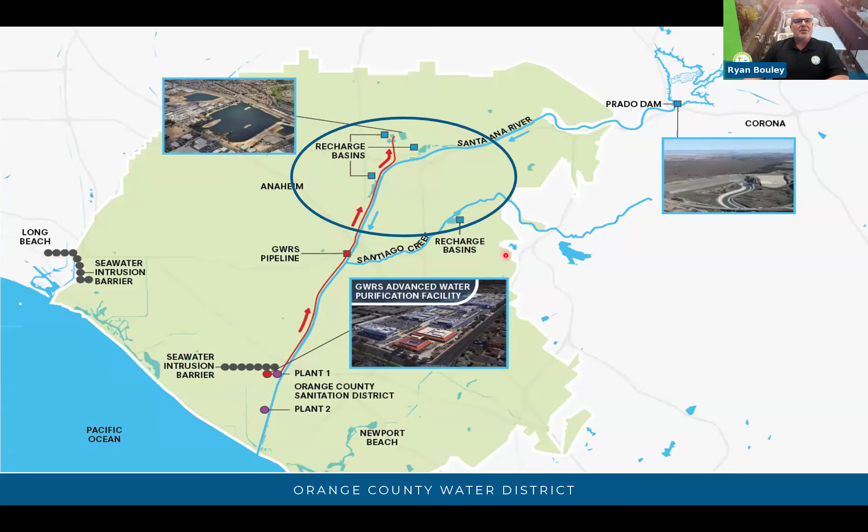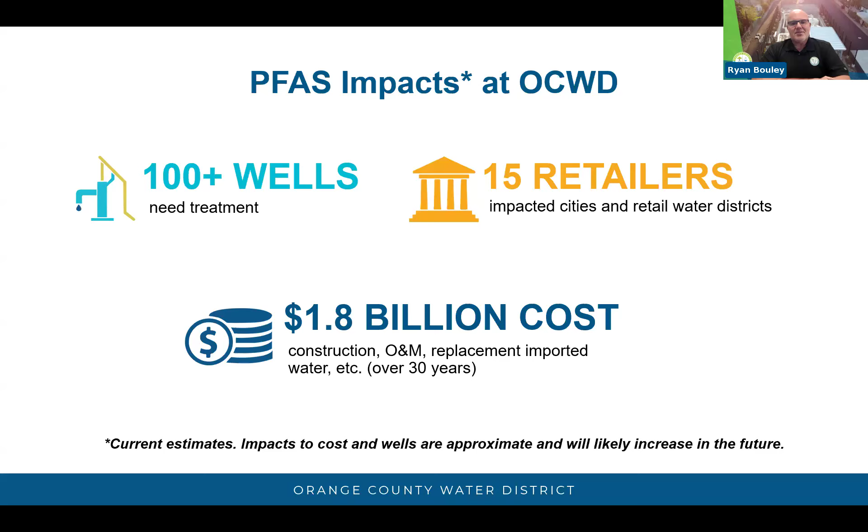So PFAS impacts at OCWD. We've identified 100 wells so far that need treatment, and I say so far because unfortunately water does move underground carrying PFAS with it. 15 retailers have been impacted so far, again. With what we've identified, we're estimating about a $1.8 billion total cost, and that's a life cycle cost over 30 years of construction, O&M, replacement imported water when some of those wells are turned off because of legal requirements, etc.

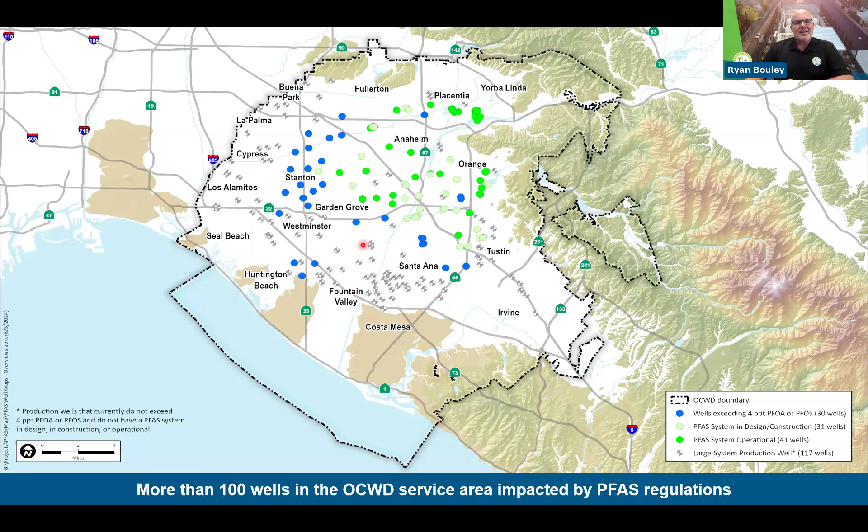This map here shows all of the wells that are impacted. So these green dots and blue dots show various wells that we've detected PFAS over the newly adopted MCL. So as you can see, this is where all of our recharge basins are. It has spread out through the basin all the way across the basin. So unfortunately, some of these others may hit at some point. We'll just have to wait and see and deal with those as they come.

So I just wanted to share a quick timeline of OCWD and PFAS. Back in 2018, the Division of Drinking Water, DDW, established a response level for PFOA and PFOS. At that point, OCWD, through its standard testing and maintaining water quality, identified 10 of the retailers' wells that were impacted by this new RL. That was a total of 62 wells. And so that was what we called round one of our program.

We started a PFAS pilot study testing multiple media with multiple retailers' water just to find out which media would be best. PFAS treatment systems planning study. That was kind of a preliminary engineering study looking at all of these impacted wells, siting various types of media treatment, seeing which would work best for space and water flow rates and just trying to identify quickly what would be the best course of action.

We established a PFAS policy with all of the water retailers, what we also call producers. We started that policy back in 2019, and we agreed that we were going to take the lead on treating any well that was showing PFAS levels over 80% of the established RL or response level. Fast forward to 2020, OCWD issued its first RFP for vessels. We ended up purchasing 100 IX vessel systems, and each system is 2 vessels, so a total of 200 treatment vessels. We selected 2 vendors with that RFP, and they were able to supply the vessels we needed for round 1 and some of the round 2 sites.

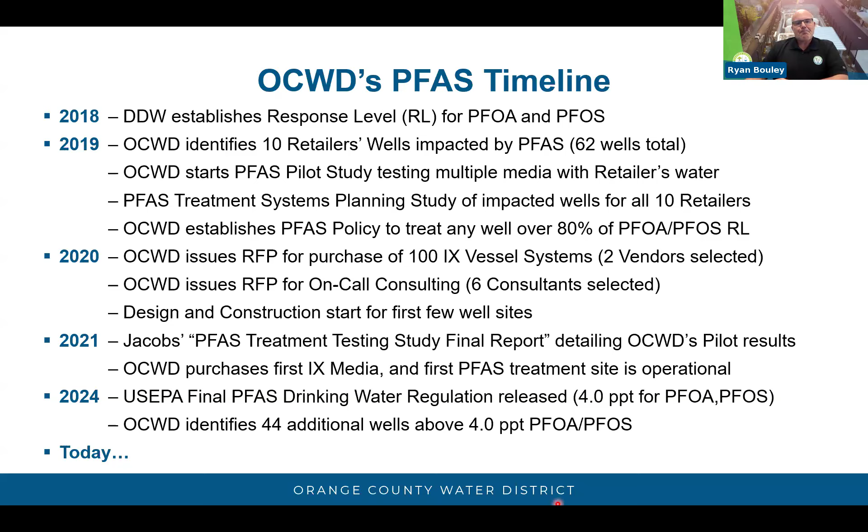So where are we today? This next slide shows a graphic of our current status. So we have 53 wells operational.

So of the 106 that are currently identified, we're halfway there, which is great. 16 are in construction with 26 in design. That number is going to change very soon. We have several projects coming out to bid, so it's going to essentially flip-flop to 26 in construction and 16 in design. And then we have 11 in planning.

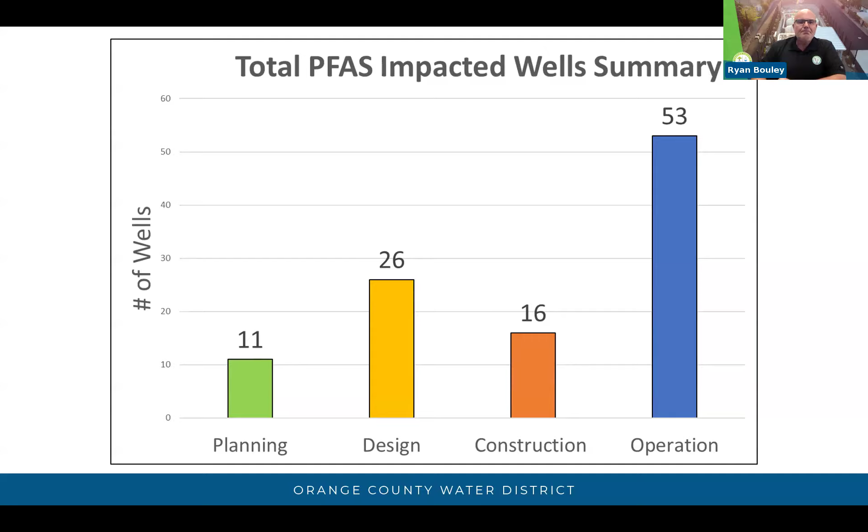And what planning means is that we're waiting for some results to show where PFAS is above the MCL, or the owners of the wells may want to re-drill the well. And so we haven't identified the location yet. And so we're just waiting until that's done to actually implement treatment. So, developing solutions.

It all started with our PFAS policy. OCWD manages a groundwater basin for all of these 19 cities and retail water districts. They all have the rights. We're a non-adjudicated basin, meaning that nobody owns the water underneath. It's all the rights of OCWD, and the producers are able to pump that water. Given that, we approached an all-for-one, one-for-all management approach, treating all of the retailers equally.

OCWD agreed to finance, design, and construct these treatment systems for the impacted wells. The retailer would maintain ownership and operation of the well and the treatment, and all of the O&M costs over a 30-year life cycle would be shared 50-50 between OCWD and the retailer. PFAS concentrations had to be greater than the applicable response level or maximum contaminant level for the well to apply.

And to date, we have 15 agreements with 15 of the 19 cities and retail water districts. So most everybody is part of the agreement. We have 4 that haven't been impacted yet, so they're not part of the agreement yet. But again, they may be in the future.

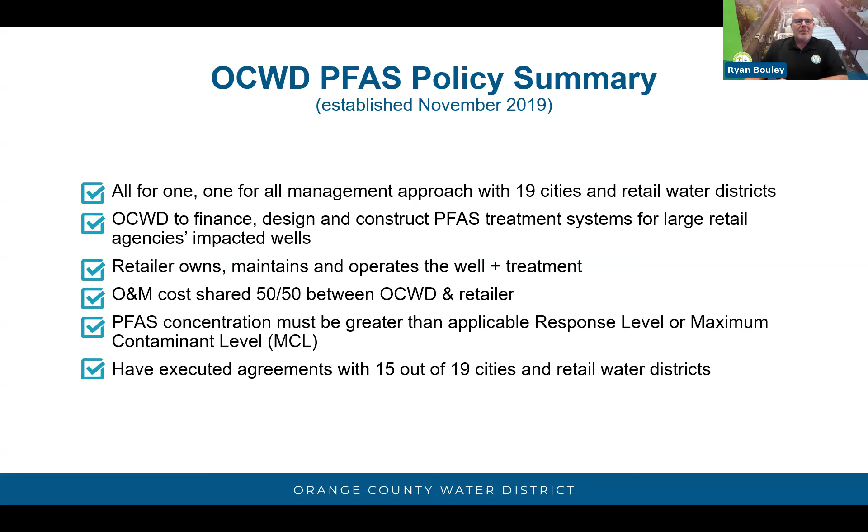So the second part, and really the key source of momentum in PFAS removal for us, has been our research and development. OCWD has a fantastic research and development team that's dedicated to basically studying how to keep water better, how to treat water better, make it cleaner, make it safer, make it more cost effective for everybody. And again, without our research and development department, we would probably still be at the starting blocks with PFAS removal.

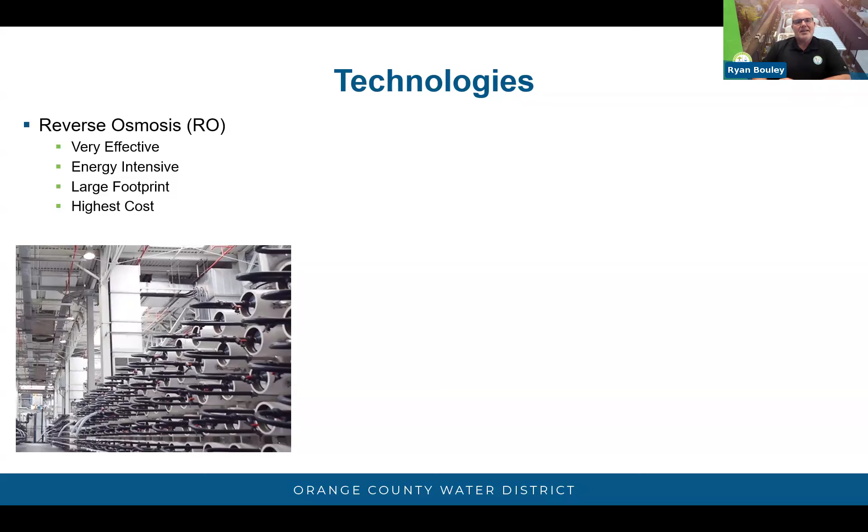So they've helped us identify technologies that we can use for PFAS removal. The first is reverse osmosis. We're currently using that with our GWRS system. It's very effective. It removes essentially everything from water, including PFAS. However, it's energy intensive, has a very large footprint and is really expensive, the highest cost of all of the identified technologies.

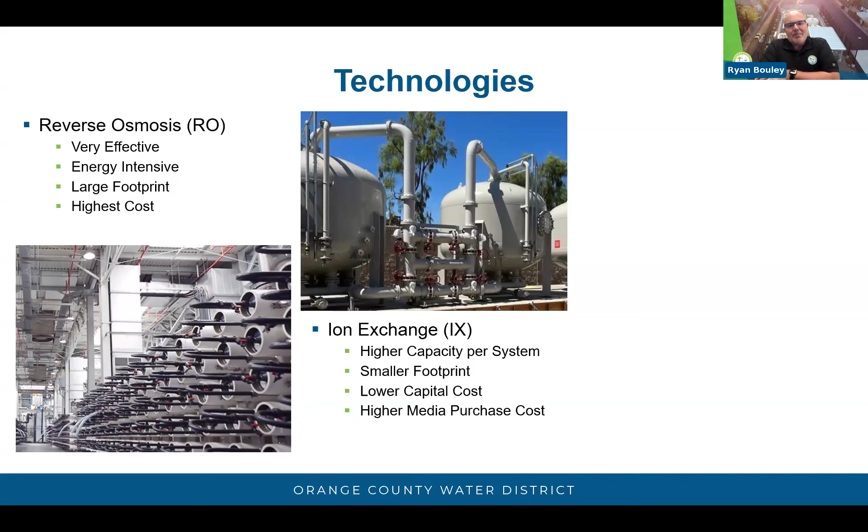The next technology that we identified was ion exchange. It has a higher capacity per system than the next one I'll talk about, a smaller footprint, lower capital cost, but it does have a higher media purchase cost. The next is granular activated carbon. Compared to ion exchange, it has a lower capacity per system, a much larger footprint because of that lower capacity per system, and higher capital cost, related to more vessels needed to treat the same amount of water. However, the media is much less expensive. So there's trade-offs with both technologies.

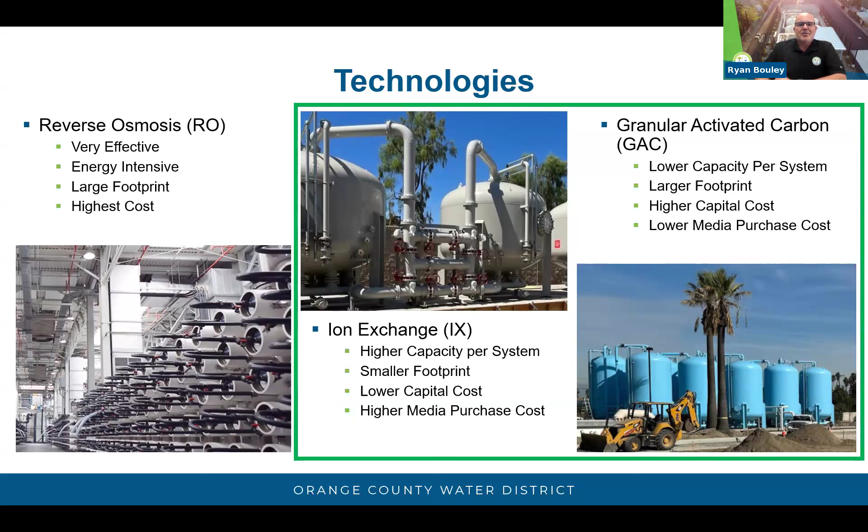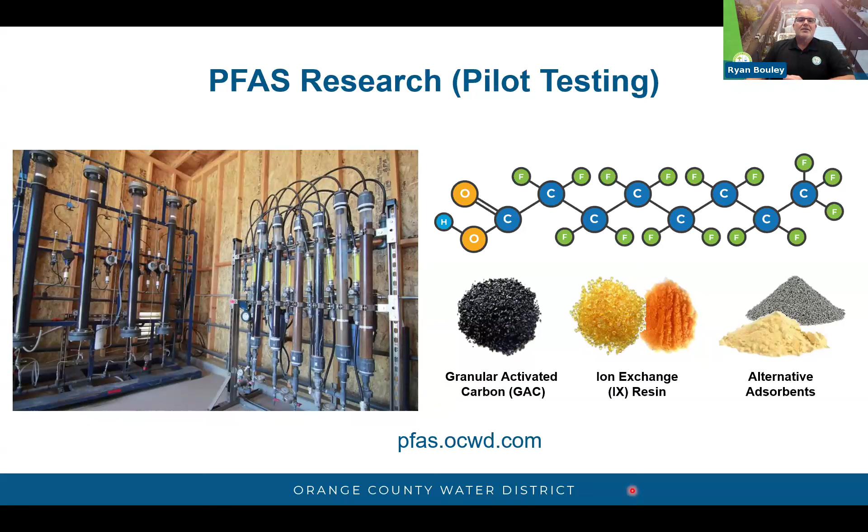We ran those in pretty much a full-scale type pilot that ran to failure. So this system ran for over a year, and we were able to monitor the PFAS levels as it was running and really get a good feel for which media was performing best, which broke through first, which lasted longest, and ultimately helped to determine which one was going to be most cost effective for OCWD and the retailers.

So from there, we started implementing treatment. This is the ion exchange media that we're ultimately using. It's Evoqua PSR2 Plus. On the left, you can see a photo of it. It's kind of a light, creamy white tan color.

On the right over here, you can see the size of the media compared to a penny. I apologize, I didn't have a millimeter ruler, so I had to go with a penny, but it's a very small resin. Very small pore spaces between the individual resin grains. What that means is that the ion exchange system that's preferred for most sites ultimately requires prefiltration.

Now, the prefiltration removes anything in the water upstream of the IX treatment larger than 5 microns. You can use cartridge filters or bag filters, but you really have to remove that larger than 5 micron material, or else it will clog those pores in between the little individual media grains, and your media bed will stop working much sooner.

So for our typical ion exchange layouts for 99% of our sites, we're using a 1220 dual vessel system. That means 12-foot diameter. It can hold up to 20,000 pounds of media. It's a 16-foot height overall with a 1,600 gallon per minute flow rate using 424 cubic feet of this media. And that provides a 2-minute empty bed contact time per vessel, meaning that the water is 2 minutes of contact with the media to remove PFAS.

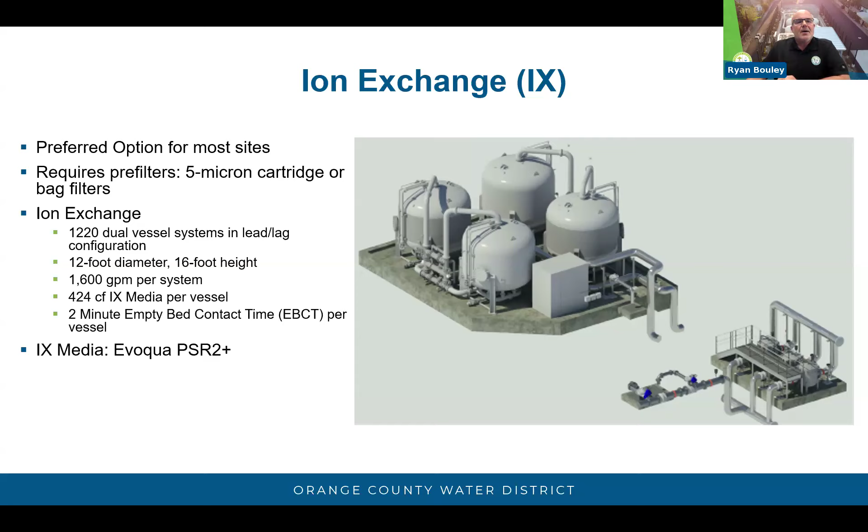They're a little bit more difficult to access because of their height, and there is just more hardware involved. The benefits to these bag filters are a lower unit consumable cost. The bag filters themselves are less expensive, and there's less of them in these cartridge canister or bag filter canisters.

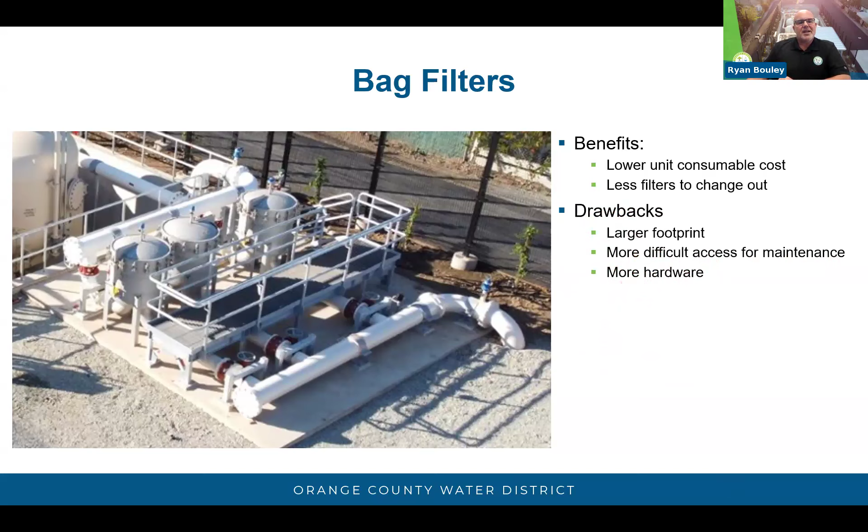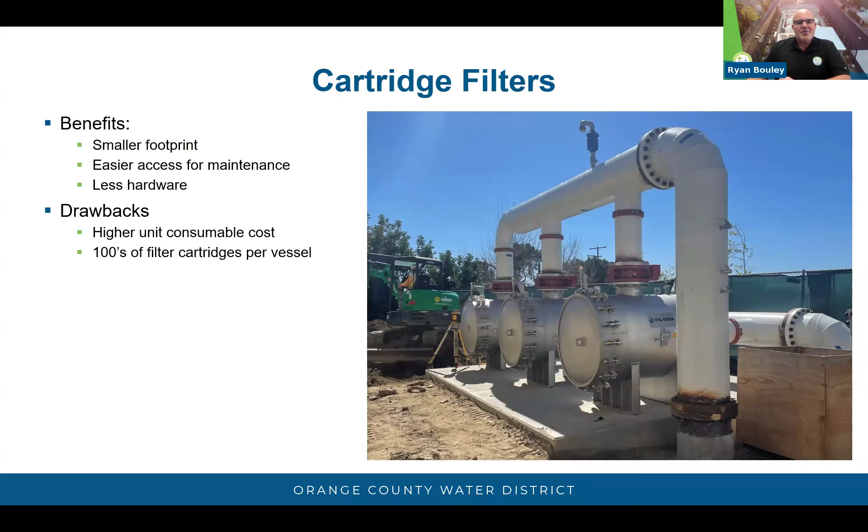The reason we're using granular activated carbon at this particular site is because of co-contaminants, volatile organic compounds, or other organics, basically carbon compounds that are not compatible with the IX media. These require a 10-minute empty bed contact time per vessel, and that's part of what makes them so much larger and makes you require more vessels overall.

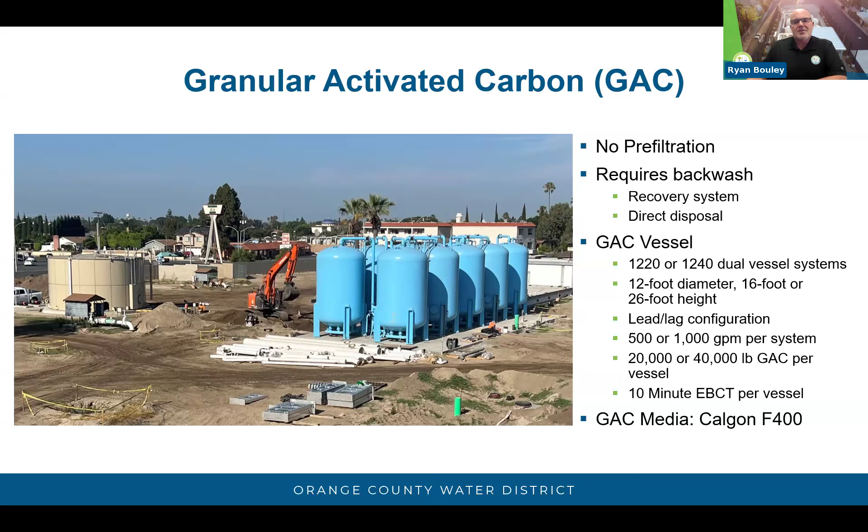And of course, the media that we tested out best for our particular usage was the Calgon F400, and that's what we're using at this site.

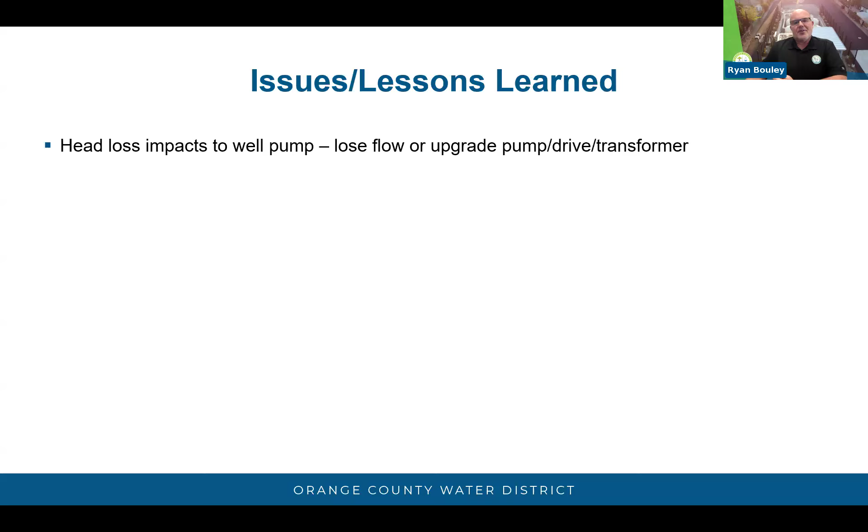So now moving into some of our issues and lessons learned, there is going to be head loss and impacts to your system if you're implementing PFAS treatment. You can't get around that. The pre-filters will clog up over time, and that will increase head loss. The media will start to degrade, clog up, that will increase head loss. So up front, looking at it from a design point of view, you may either decide that it's okay to lose flow, or you may decide you have to upgrade your pump and drive and power system in order to make that work.

Footing designs. Installing these vessels can be pretty tricky. There's a lot of parts that have to assemble, and some of them are very rigid. So 2 options: you can cast in place these anchor bolts that are shown here, which is, you cast your foundation, the anchor bolts are already installed. But if you have 4 of these bolts times 8 legs, that's 32 bolts. All of the holes have to line up. That can be difficult, or it can be a risk.

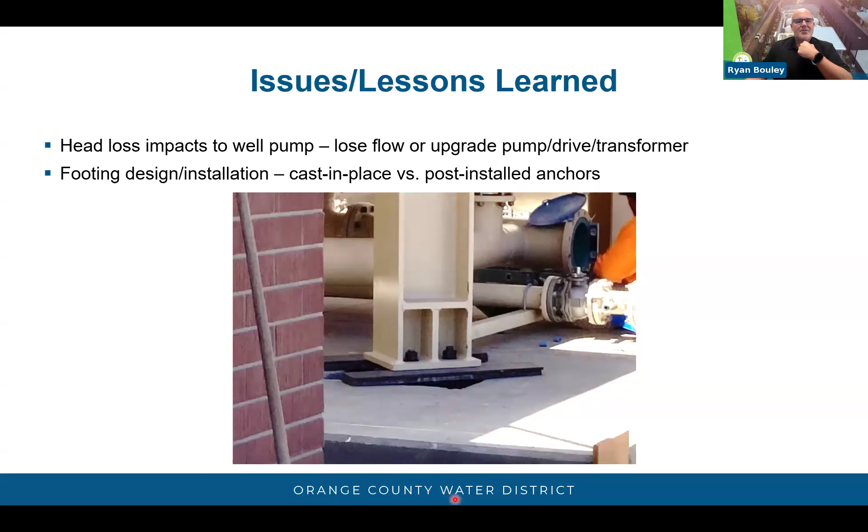So this contractor here elected to install post-installed anchors, and basically they blocked out a hole underneath the leg of the vessel. They set the vessel on some steel plates, hung the anchor bolts from the vessel, and backfilled this with concrete later. That takes away all the guesswork, and it allows for maximum adjustability during construction.

IX feed and return pipe placement. I've had some sites where the piping was designed underneath the slab, and other sites where the piping was not. We did find that there was a significant schedule impact to the pipe being placed under the slab, because that pipe has to be installed before the slab can be built. So sometimes space doesn't allow anything different, but if you can avoid it and you have a schedule consideration, avoid placing piping under the vessel pads.

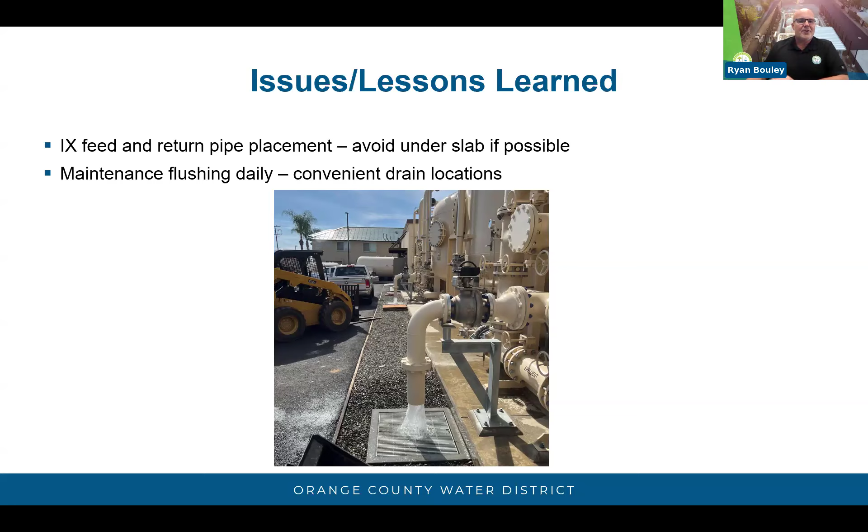Maintenance flushing. If the system is not going to be run every day, you will need to do some maintenance flushing, and that's just to keep the media fresh, prevent bacteria growth. Convenient drain locations will be a lifesaver for you. You can see here in the photo, they placed a drain inlet directly below the discharge, and this is just a maintenance discharge here from the vessel systems. Makes it really easy to perform that maintenance flushing and not have to have a bunch of hoses that you direct water over to a drain anywhere.

SCADA controls. So SCADA, for those of you who aren't familiar with SCADA, SCADA is basically the computer system that controls all the physical stuff at a site. There's an existing system most likely that controls your well, and it controls the pump. It controls all of the power going in and out of the site and all of the devices that keep everything running. PFAS treatment will add to that SCADA. There's a few inputs and outputs, not many, but there are some.

We found several sites where the existing SCADA controls were out of date. It's just like a computer, the software is not supported anymore, or the computer's not supported anymore. So we had to replace PLCs or upgrade equipment. So that's something that you'll have to look at. There could be more costs than you're anticipating there.

Non-chlorinated water for flushing. That maintenance flushing I was talking about and flushing at startup. IX media is incompatible with chlorine. The chlorine can turn the media into goo, melt it more or less. So you don't want to use any chlorine in the water in the media.

And then sanding in wells. Sanding is a term that we use for any kind of sand or material down underground that makes it through the well screen and up into the water. If you have sanding at a well site, it will prematurely fill and age your cartridge or bag filters. So you really should deal with the sanding somehow.

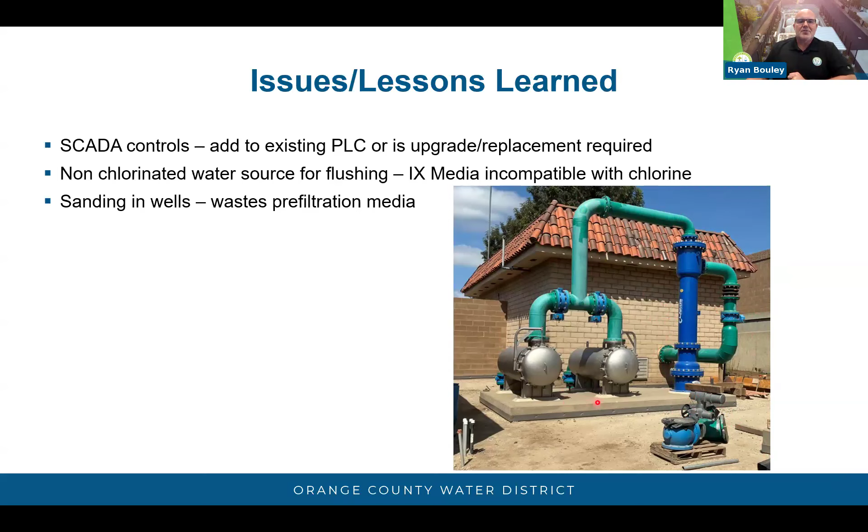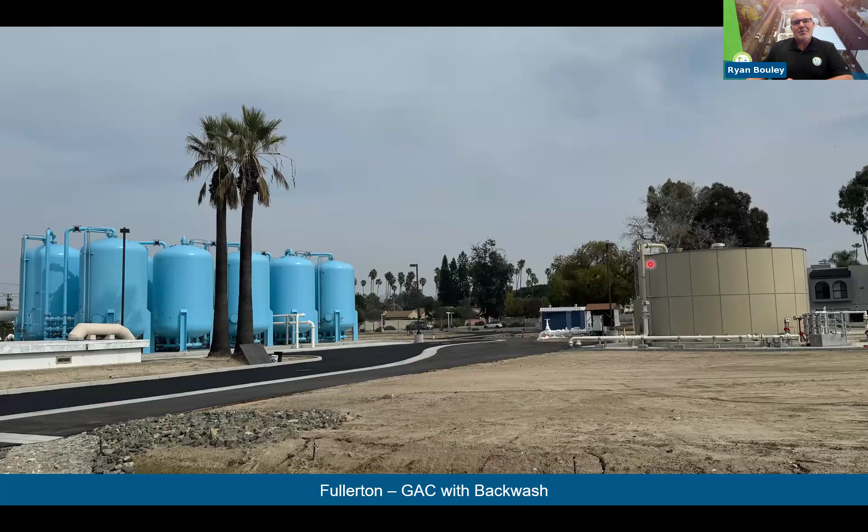So now I'm just going to go into a few photos. This was our GAC system once it was finished, nice paved roads, but it shows our vessel systems here with our backwash tank. This here is our largest PFAS treatment system to date. There are 11 systems, 22 vessels.

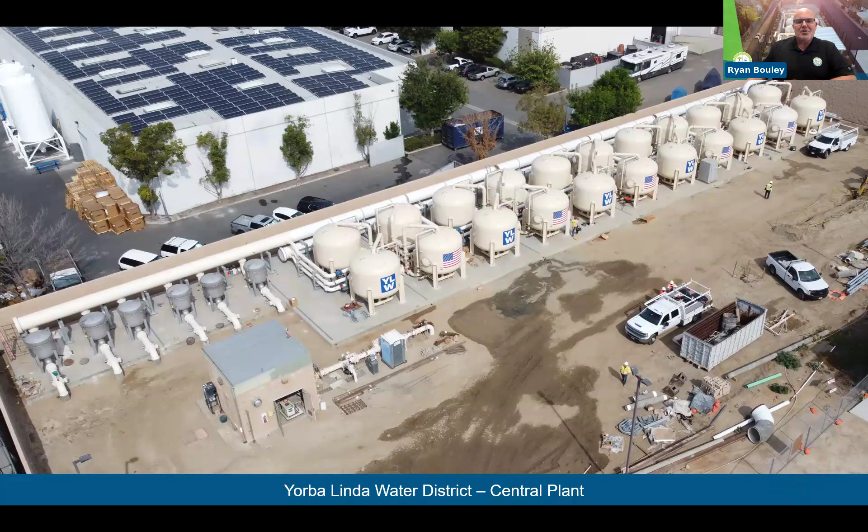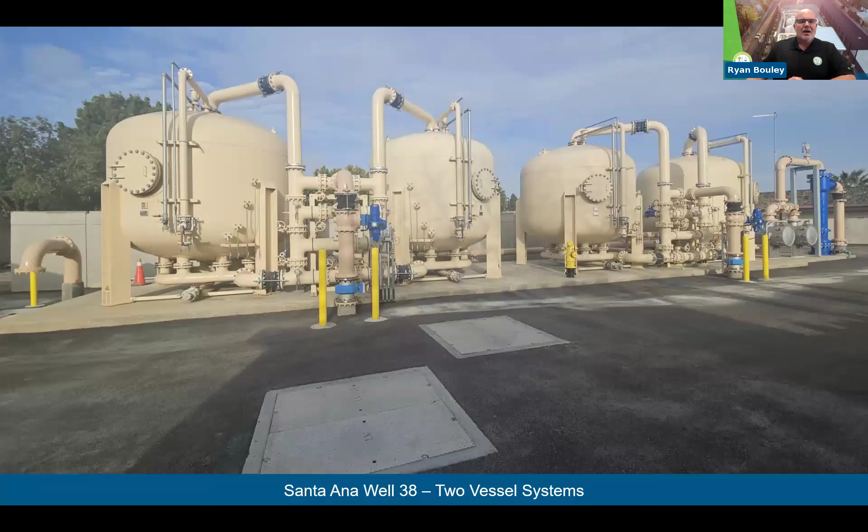This is the configuration that we have for, again, probably 99% of our treatment sites. Just vessel systems stacked up to make 1,600 gallons per minute per system, to match the flow rate of the well. You can see here this one has a sand separator off to the side. This one must have a sanding issue in the well itself.

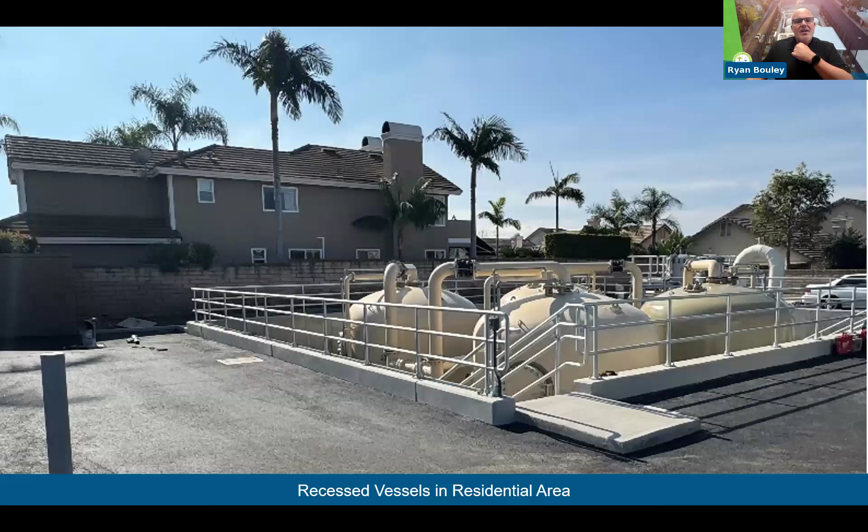Now, maybe you have a site with visual restrictions or visual concerns. The next couple photos show some alternatives. These vessels were placed into a recessed pit. So the floor of this pit's about 10 feet below existing ground, making the top of these 16-foot vessels right about even with the block wall behind it. So it's very easy on the eyes from the front of the site and hard to see.

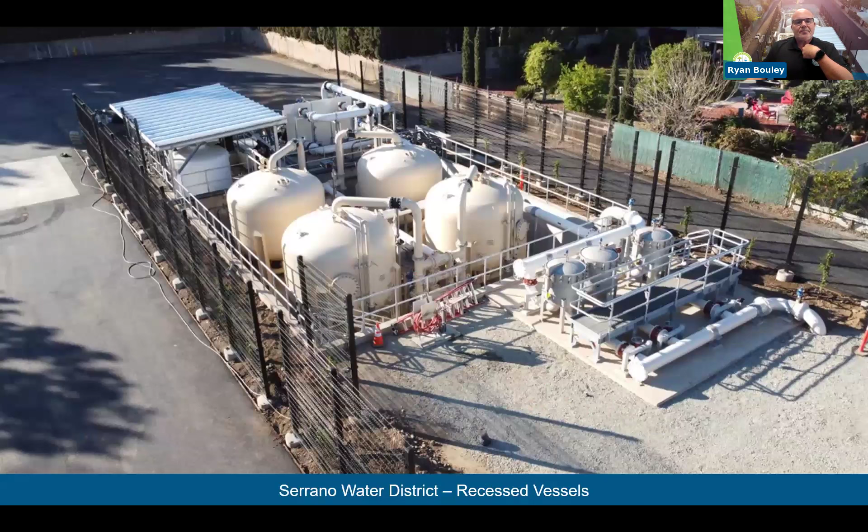And then here's another very similar recessed pit, similar situation. You can see it's surrounded by residential, and they just wanted to be nice neighbors and place these vessels in a recessed pit. So that's all I have for the implementation, and I'm going to hand it over to Andrew for tracking.

Get this shared. There we go.

All right. Thanks, Ryan. So yeah, my name is Andrew Huang. I am a senior laboratory analyst and data scientist here at OCWD's R&D department. And while Ryan told you about how we're physically removing PFAS, I'll be telling you about the other challenge in our new PFAS treatment program, which is the data management. So just over the course of a few years, PFAS went from being an unregulated compound to being a major part of our operations. So I'll show you how we keep all of our PFAS monitoring data organized and actionable despite the influx of all this new data.

So first off, to understand why the data poses a challenge, I need to give a bit more background about how the treatment facilities are operated. As Ryan mentioned previously, we use ion exchange adsorbent media to treat the PFAS at the majority of our treatment facilities. But unfortunately, the adsorbent media has a finite life before it's exhausted of its adsorbent capacity, meaning we need to anticipate and change it before it's reached that point. So as a result, we need to closely monitor PFAS concentration of water at multiple stages in the treatment train by taking samples and testing it with EPA method 533.

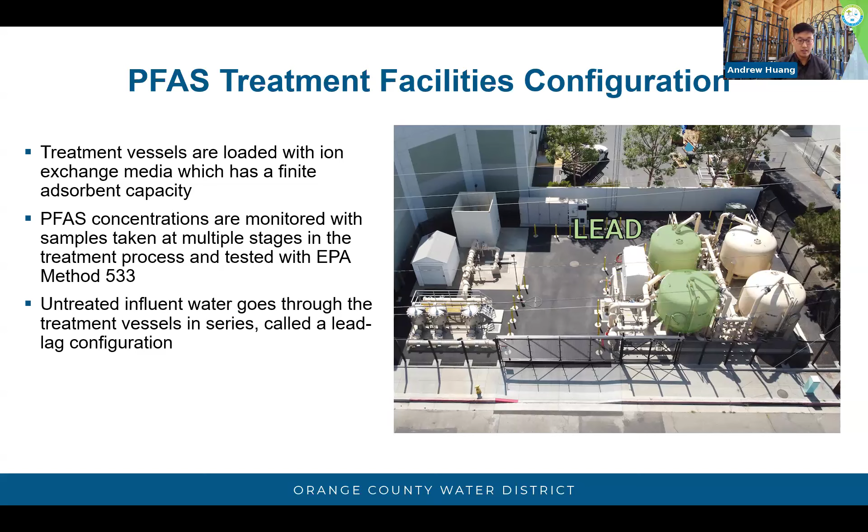So on the right side of your screen, you'll see a treatment facility with two trains, with each train consisting of two vessels. So treatment vessels are organized in a lead lag configuration where untreated water goes through the two treatment vessels in series, called the lead and lag respectively. So highlighted in green, that's the lead vessel, which is where the water first enters. And then the effluent from that goes into the lag in purple. So the lead lag setup allows us to use the lead vessel as an indicator because we can measure what's coming out of the lead before it goes into the lag vessel. And once the lead vessel is exhausted of its adsorbent capacity, we change the ion exchange media.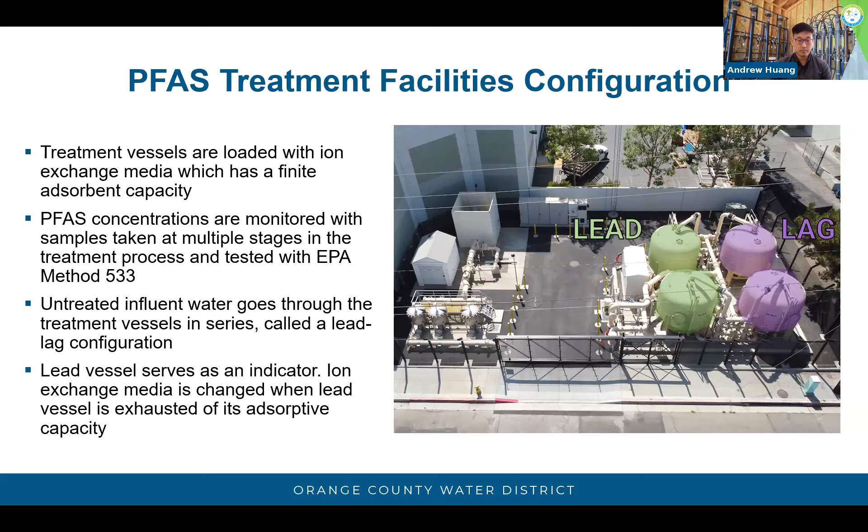So this is to give you an idea of what our PFAS monitoring actually looks like operationally. Currently, we have 27 treatment plants online, but that final number will likely be around 68. For each treatment facility, we're required to do monthly sampling of the lead vessel and combined effluent. But additionally, we also have to do quarterly sampling of all the points in the treatment train, which includes influent, lead, lag, and the combined effluent.

So samples are brought to our lab, where they're tested for 25 different PFAS analytes using EPA Method 533. And I think we probably have the highest volume of samples analyzed for PFAS of any public agency in the country. So we're currently analyzing about 5,000 PFAS samples a year. And we were also the first public agency lab to be accredited for testing PFAS in drinking water.

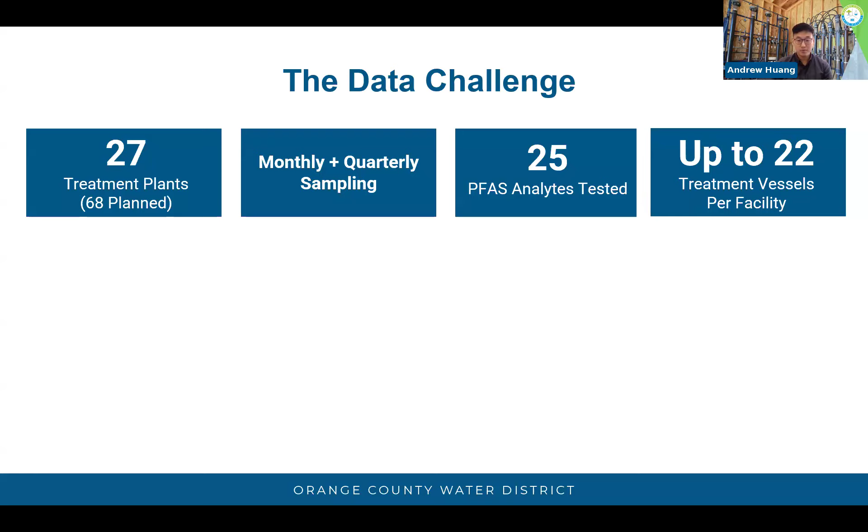So with the number of treatment facilities, multiple treatment trains per facility, monthly and quarterly sampling, and number of analytes measured, we're constantly generating a huge amount of PFAS data. And here's the data challenge, just to put the scale into perspective a bit. With 27 treatment plants currently online, again, with total 68 planned, monthly and quarterly sampling requirements, 25 PFAS analytes tested as a part of Method 533, and up to 22 treatment vessels per facility, we're generating approximately 100,000 individual PFAS measurements annually. And that number is only going to increase even further once we have all the treatment facilities online.

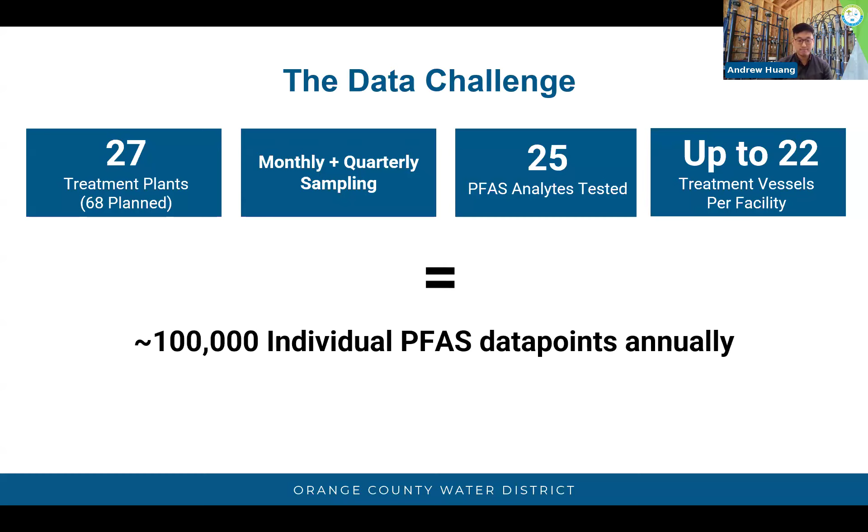So that begs the question, how do we manage all of this data and make sure it's actually usable? Well, one of the ways is through a PFAS treatment facilities dashboard. So this is an in-house developed dashboard created in R using the Shiny framework and deployed on our internal servers. It runs from your web browser, so you can bookmark it and access it without launching any additional programs. The application is able to pull data automatically from various sources, including our laboratory database and various uploaded CSV files. And it also just automatically refreshes once a day. It was also created and deployed using free open source tools. This wasn't a requirement or anything, but it's a nice bonus.

One of the main priorities for the tool was to create a quicker workflow and to give both an at-a-glance high-level overview, but also give the ability to drill down deeper into the data if necessary. Another goal was a user-friendly interface. We wanted to make sure somebody who had never seen the tool before could start clicking around intuitively without actually being trained on it.

And lastly, it also serves to sort of democratize the data by giving access to more stakeholders. Whereas before you might have a couple people with a running spreadsheet where they have to constantly query the data, update the spreadsheet and send it out, you now have a dashboard that's accessible to all stakeholders who can explore the data themselves.

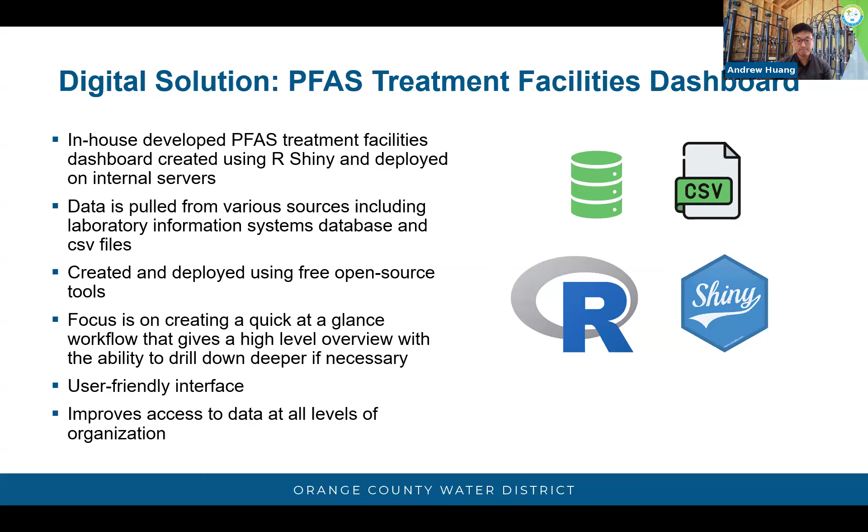So now I'm just going to give a quick overview of what the dashboard looks like and some of its current capabilities. A quick disclaimer is that all the city and well names were anonymized for this presentation. But we start out here on the home page of the dashboard. So on the left side, there's a map module with all the treatment facilities colored by PFAS breakthrough. So green means there's no breakthrough, orange means there's breakthrough in the lead vessel, and red means there's breakthrough in the lag vessel. Again, this goes back to the idea that we should have quick at-a-glance information. So here we can immediately see what sites have experienced initial breakthrough and monitor them accordingly.

So if you click on one of those sites, we can see more detailed info about it, including which city or retail agency it belongs to, the number of treatment trains, and when it was last sampled. And also on the right side of the screen, it'll show the latest PFAS measurements for that particular site, along with when each vessel was last changed out.

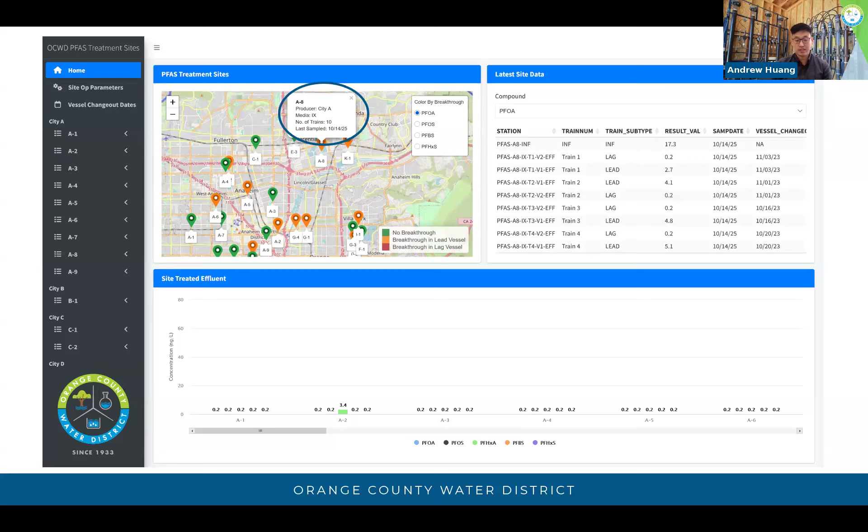So still on the home page, but scrolling down a bit, we can see an overview of the influent and effluent going in and coming out of these treatment facilities. That top chart is effluent and the bottom chart is influent. As you can see, there's varying levels of PFAS going into each site, but it's all being removed to extremely low or non-detect levels. We specifically focus on PFAS analytes with the regulatory limits, but the dashboard is capable of viewing them all.

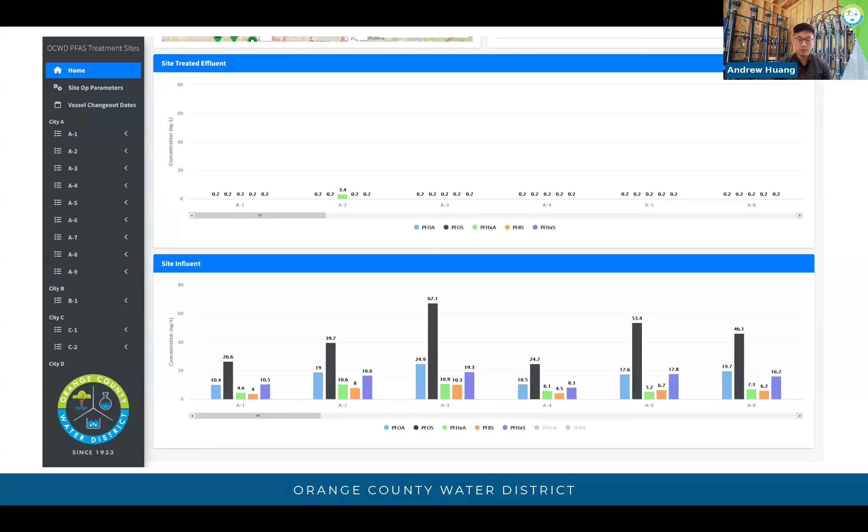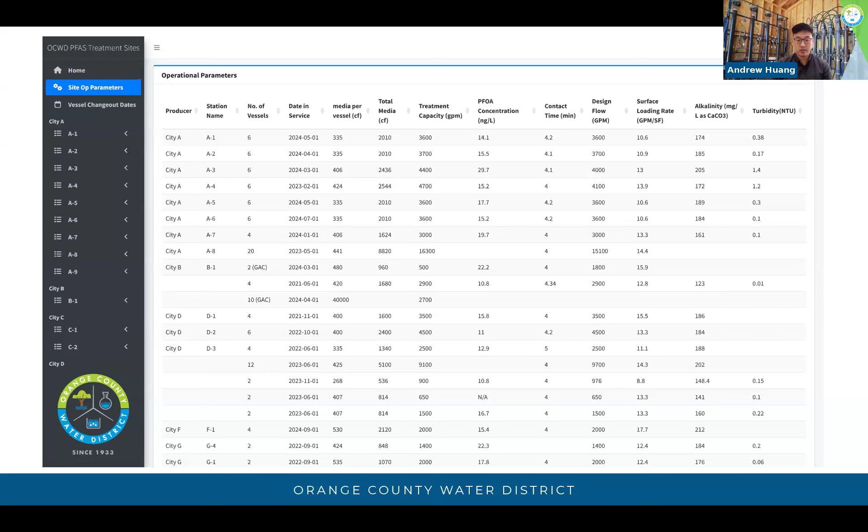In this next tab is the operating parameters for each site. So this page just serves as a quick reference to see basic facts about each treatment facility, including the city, the well name, number of treatment vessels, when it was put into service, and the amount of media per vessel. But this table is mostly static. It just helps keep all of our treatment facility info in one place so you don't have to consult another document.

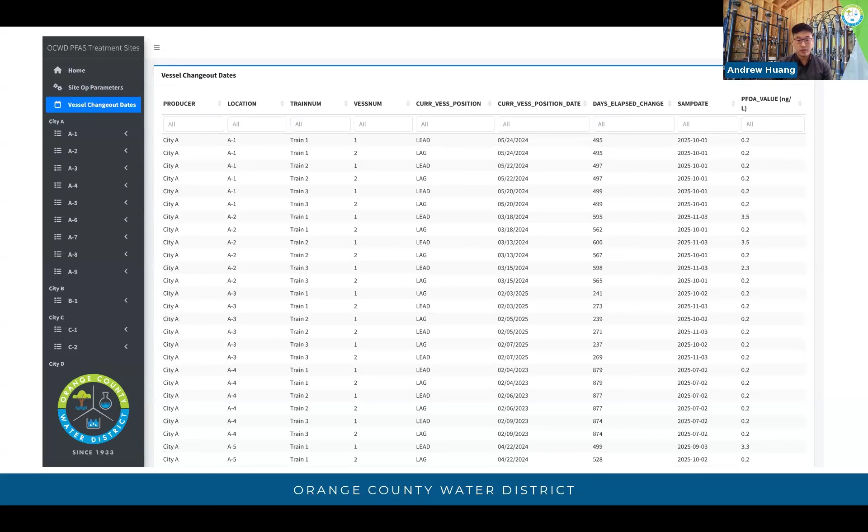This next page shows the vessel changeout dates for each treatment vessel. This includes info like if it's currently serving as a lead or a lag, when it was put into that position, how many days have elapsed since then, and the last measured PFAS values from that vessel's effluent. So you can filter and sort each column. So for example, if you were looking to figure out which vessel has gone the longest without a media changeout, you could do that here.

Now we drill down into specific treatment facilities for a deeper dive into the data. Here I've selected treatment facility A8. Again, that's an anonymized name, but we can see what the last measured PFAS concentrations are at each stage in the process for each PFAS analyte. So we begin with the black bar on the left, which is influent going into the treatment facility. Then if we look to the right, we can see the concentration in the lead and lag for each treatment train.

As you'd expect, there's only initial PFAS breakthrough in the lead vessels of each train. Once it reaches a particular breakthrough threshold, we know it's time to change out the media. So this particular treatment facility is a 10-train system. And finally, on the far right, we have the combined effluent from all the treatment trains blended together and the finished product coming out of each treatment plant. And again, as you'd expect, it's non-detect for all of our analytes of interest.

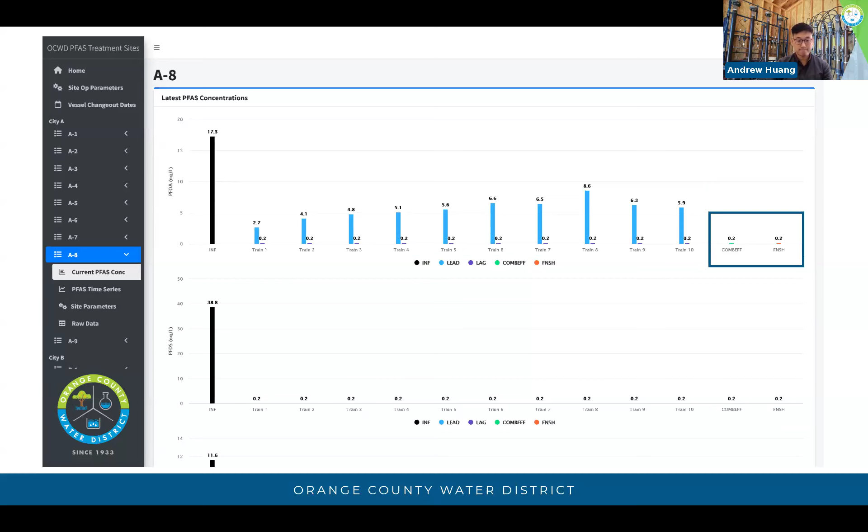And still looking at treatment facility A8, we can move on to the time series data. So as opposed to the last tab, which just showed the latest PFAS values, the time series page shows us how PFAS concentrations have evolved over time at this given site. We can select which vessels we want to look at and the time period and get a detailed look at how PFAS has broken through over time. Naturally, you can also hit the little menu in the top right of each chart to download it as an image if you want to put it into a report or presentation.

And here I'm showing the influent with that black line and also the lead vessels from the first 4 trains. And you can see how it's broken through over the last year at this site.

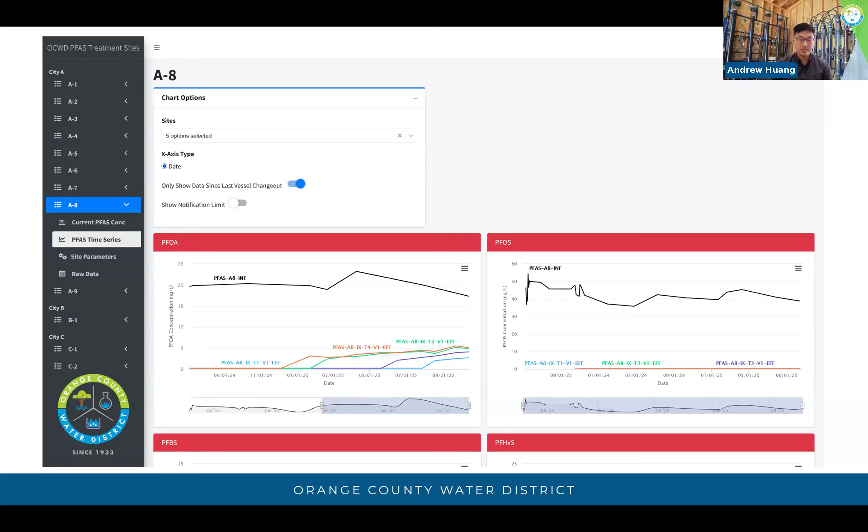And finally, the last page I'm going to show you is just the raw data tab. So this is just all the data we have for this selected treatment facility in tabular format. So one thing to note is this dashboard isn't and wasn't really meant to be a complete replacement for all the PFAS related workflows that we do. So there's still a lot of downstream analysis that we're doing or can be done outside of the dashboard. But this at least gives you a quick way to download that data without having to query your database. So even if you're not really using the dashboard for analysis and visualization, it can still save you time in that department.

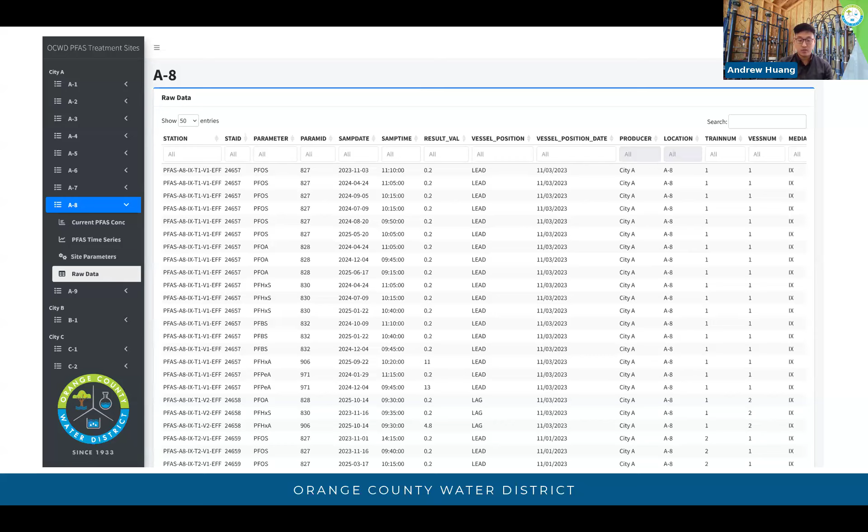And that's it for the preview of the dashboard. So the question is, where are we taking it next? Well, for starters, we want to incorporate modeling and prediction. This one's been on our wish list for a while, but right now the dashboard is more descriptive than predictive, but we're hoping to change that. The advantage of all this data we're generating is that we're slowly building one of the largest and most robust PFAS breakthrough data sets out there.

We're exploring several different options for prediction, from mechanistic models to machine learning. We want to not only be able to predict PFAS breakthrough given the first few PFAS measurements, but also be able to predict breakthrough for brand new sites based solely on their groundwater characteristics. With these forecasts, we can also better anticipate media changeouts, which has the added advantage of allowing us to bulk purchase media, which gives us better pricing.

Next, we also want to expand access and partner data. Like I said before, it's the cities and retail agencies themselves that are the ones actually operating these plants, while OCWD provides PFAS monitoring and advises on when to change the media. So it's not a guarantee, but we're at least exploring the idea of possibly granting agencies direct access and turning this tool from an internal dashboard to a shared planning tool. And tying into that, we also want to collaborate with them more to get more operational data from them, which will allow us to sharpen our breakthrough predictions.

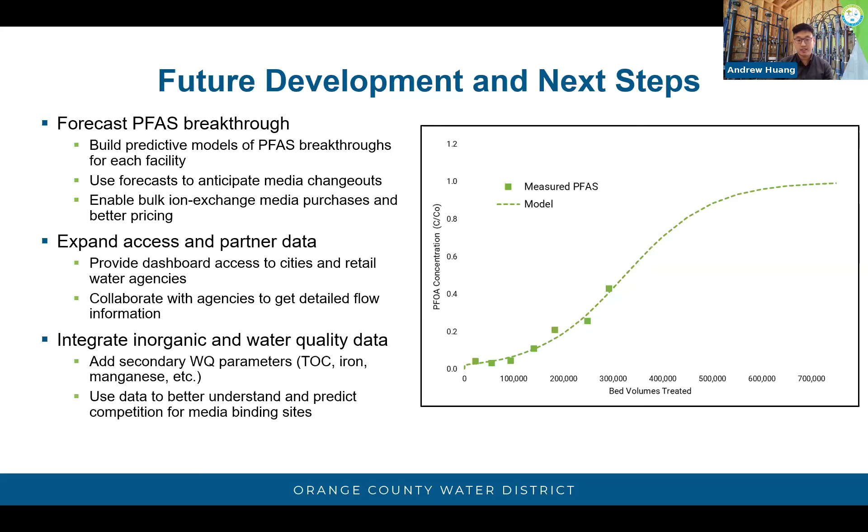And in summary, our goal is to move from just tracking PFAS to actually anticipating PFAS, which can have a big impact on improving reliability and cost effectiveness at these treatment facilities.